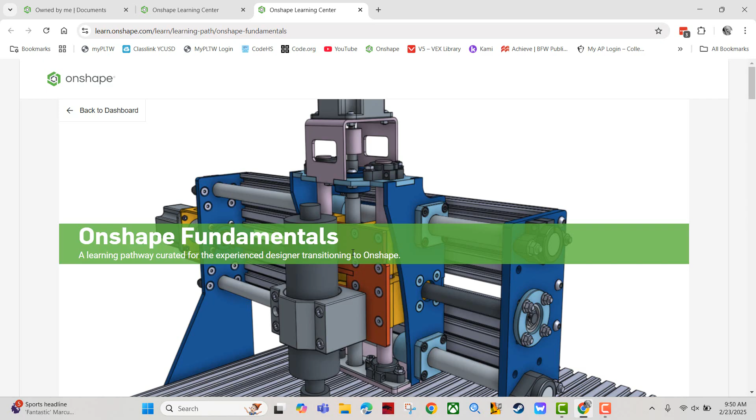So I'm going into my learning center and my Onshape fundamentals pathway, going down to Part Studios. This is the last one in the Part Studios category, and I'm going to scroll down to the rocket guidance reflector. I was close. All right, so there's the crazy thing we're going to make. It's that kind of copper colored part there on the top. So I'm going to hit next page, and we're going to get to the first of the instructions.

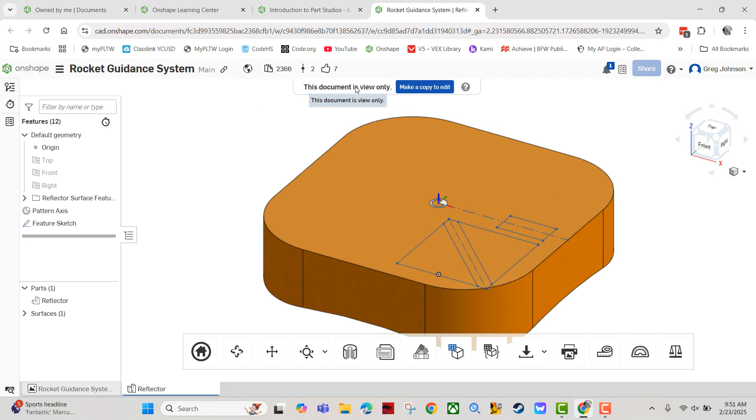Now, this is one of those ones that has a pre-made part. We're going to click on this link to open the document, Rocket Guidance System. So I'm going to click on that, and there's our reflector. Okay, it already has an appropriate sketch and everything that we need to get started. So if you notice, it says this document is view only, make a copy to edit. That's the first thing you have to do.

So let's click on that button, and I'm not going to rename it, but I am going to click on owned by me. I don't think you have to do that kind of thing because your folder system isn't as complicated as mine, but there you go. Now let's go back to our instructions.

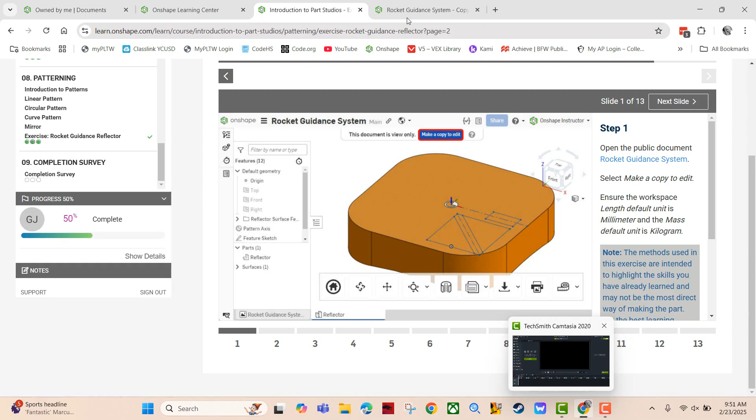So ensure the workspace is millimeter and mass is kilogram. Okay, so workspace is millimeter, mass is kilogram. I mean, length is millimeter and mass is kilogram, so we're good there. Let's see what else they want us to do. Okay, just go to the next slide.

Okay, investigate the new document. The Rocket Guidance System contains two tabs. One contains a picture of the finished system, and the other is the part studio where design work is started on the reflector. This part studio already has multiple features completed. There's also a mate connector on the center of the top face and a sketch with different profiles.

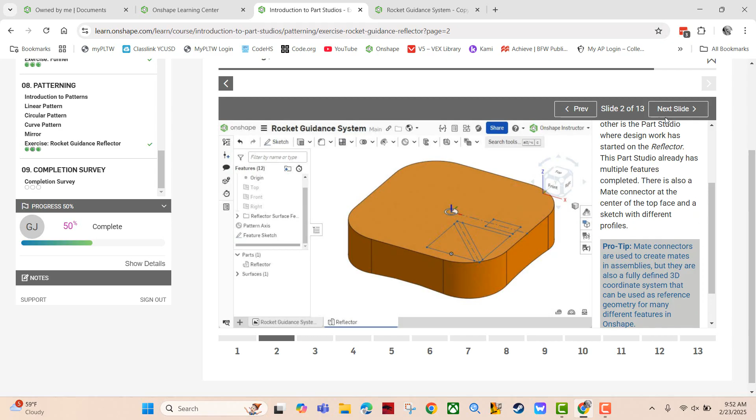Okay, so next slide. Extrude the triangular cutouts. So we're going to do a remove extrude, a solid remove extrude. We're going to click the two faces. We're going to do up to face with an offset of 10 millimeters. If we didn't click this offset, it would go all the way down to the bottom face. But the offset means we come back 10 millimeters. So it goes not quite all the way down, and then merge with all.

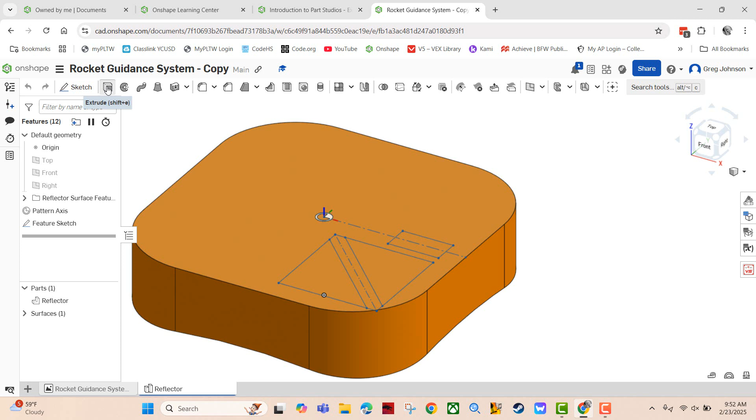So let's go back and do that. I'm going to zoom in on this and drag it to where I can see what's going on. I'm going to get extrude, remove, and I'm going to click those two faces. Okay, right now it says blind. I'm going to change that to up to face. And the face that we're talking about is the bottom of the part right there. And you notice it went all the way through. That's not what we want, but that's why we have the offset distance.

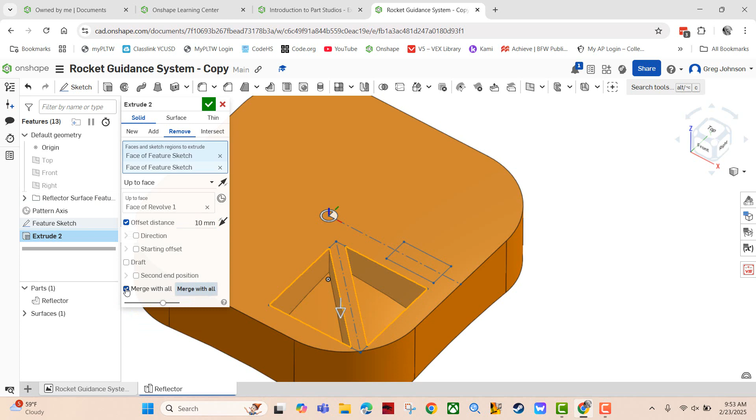So we're going to offset that by 10 millimeters. If you notice, it actually follows the contour of the bottom. That's kind of cool. All right, so there we go. Merge with all is what I believe it said. Yeah, merge with all. Everything looks good. Let's go ahead and accept that. So there's our extrude. All right, what's next?

Next slide. Add fillets to the triangular cutouts. Okay, so we're going to round off those corners by applying 6 millimeter fillets to each of those vertical corners of those triangular looking things. And we're going to do the bottom contours. So if you notice, it's curved right here, it's curved over here, lots of curves. So let's go ahead and do that.

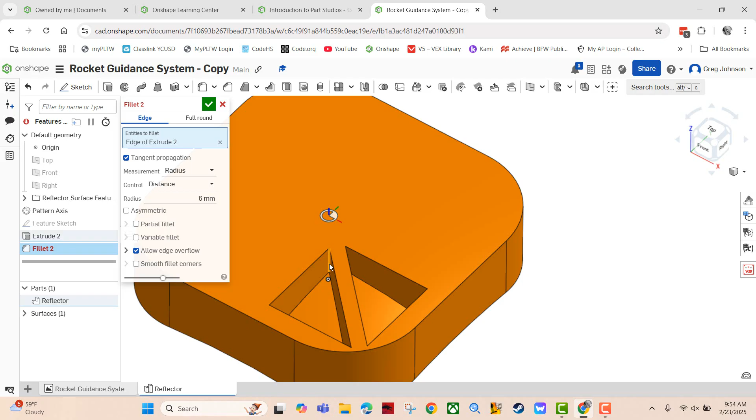So we're going to get the fillet. I'm going to change it to 6 millimeters and start clicking on things. I'm going to do the vertical corner ones first, and you're going to have to move things around so you can see the things you're trying to click on. And there's one. And there's one. And there's one. And there's one. Now I'm going to get those bottom edges.

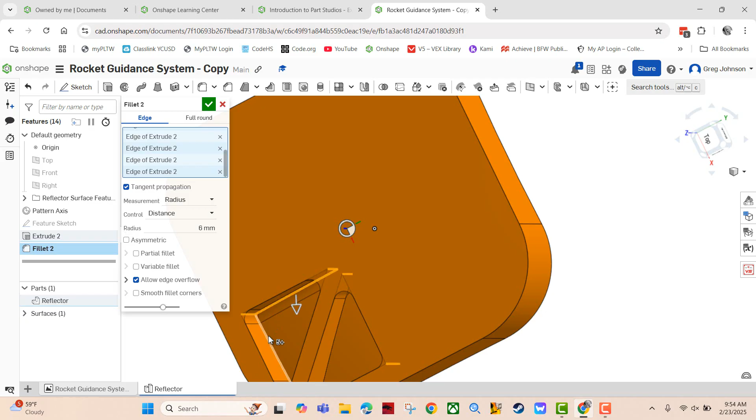So 1, 2, I'm going to do all the ones over here first. 3, 4, 5, and 6. All right, we've got all the beautiful contours. It's nice looking, isn't it? And we're going to accept that. Okay, and I'm going to go back to my isometric view and get back that look.

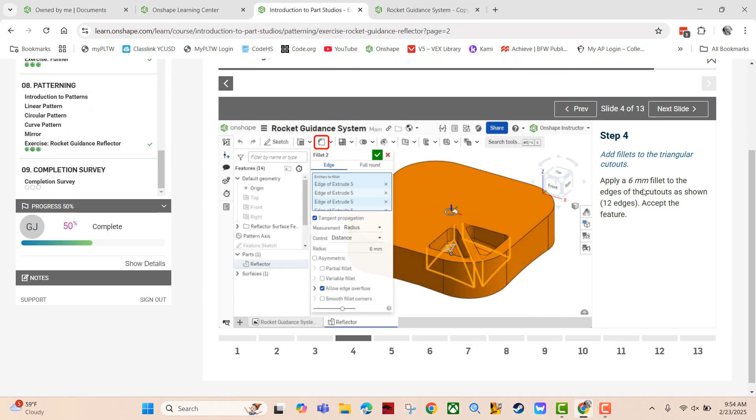Okay, what's next? We're going to do a feature pattern, a circular feature pattern. This is fun. Start a new circular pattern feature. Select a feature pattern from the pattern type drop down. With focus in the features to pattern field, select the extrude and the fillet features. Okay. And so let's go ahead and do that.

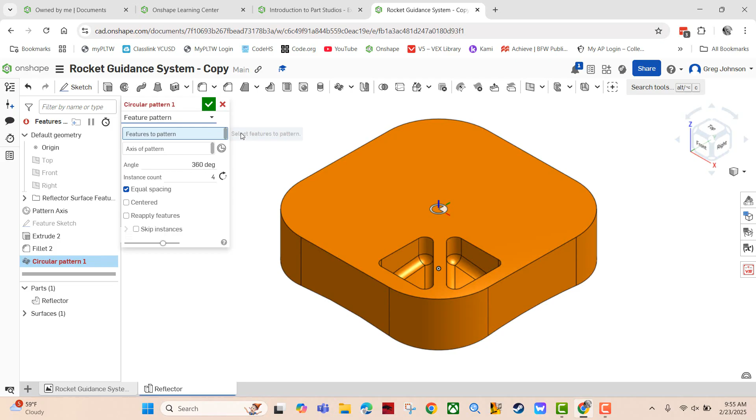So we're going to do a circular pattern. Now this is the linear pattern. If I click the drop down, there's our circular pattern. And I'm going to change it from part pattern to feature pattern. The most common thing people call me over for because they can't figure it out is because they forgot to change that from part pattern to feature pattern. Now the features to pattern, we just go over here and select them, extrude and fillet. The axis of the pattern is this guy.

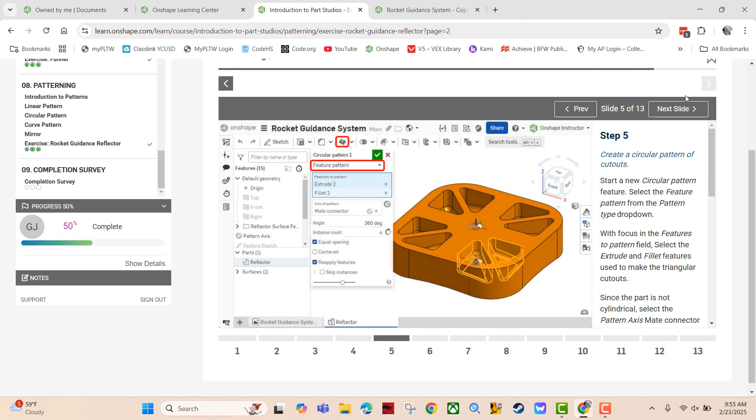There you go. That's why the mate was created in the first place. And if you notice, it's already defaulted to 360 degrees and 4 instances, which is exactly what we want. So let's go ahead and accept that. All right, what's next? Create an M45 clearance hole in the center of the face.

Start a new hole feature, select metric and simple with the focus in the sketch points to place holes field. Select pattern axis mate connector. Mate connectors can be used in place of sketch points to place holes. With the focus in the merge scope field, select the reflector part. Select the other options as shown and accept the features.

Okay, so we need to match this. So let's do metric simple and click the pattern axis. Let's start with that. So the hole, there we go. We're going to make it not counterbored, but simple. Sketch points to place hole. We're going to do that. There you go. And it made a little baby hole, but that's not the one we want. So let's go back and see what we want.

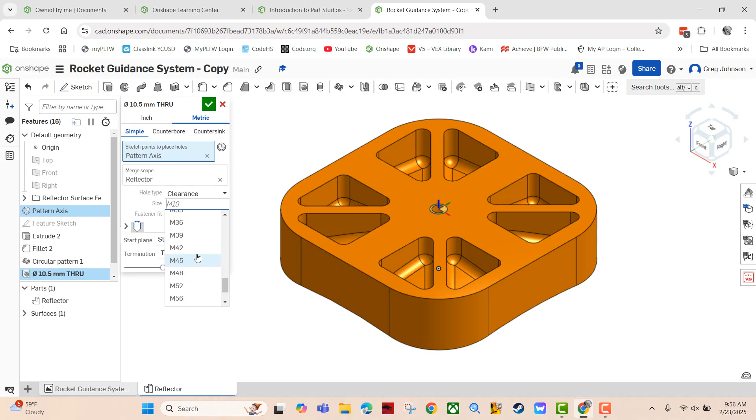We want a clearance M45 and close. So hole type clearance. We're going to scroll down to M45 and close. And if you notice, clearance, it went all the way through. Kind of makes sense. We're going to go clear through it. Okay, but if you go down to here, it says 48 millimeters, start from part, blind. So let's go back and, 48 millimeters, start from part, not through all, but blind.

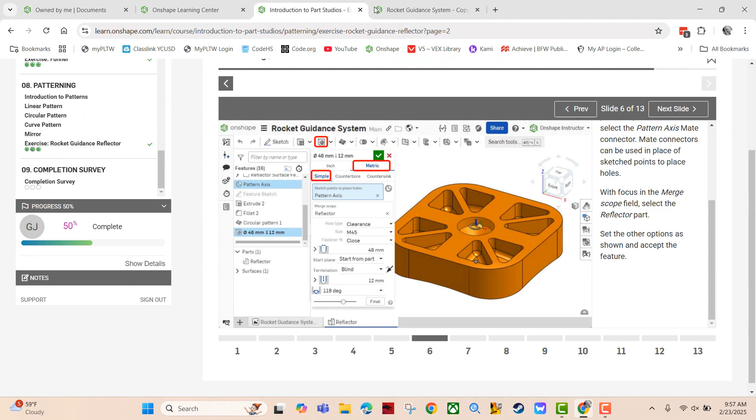There you go. Now you notice it still doesn't look right. You can still see a hole down there. So we got to go back and get a little bit more. We want 12 millimeters and 118 degrees for that angle at the bottom. So that, oh my God, I already forgot what it said. 12 millimeters and 118 degrees. So it's already at 118 degrees. We're going to change it to 12 millimeters. And now we have what we're looking for.

You notice the bottom face kind of looks like a drill bit. That's kind of exactly what it is. Okay. And let's make sure there's nothing else we need to do. Looks about right to me. So we're going to go ahead and accept that. All right, moving on. Next slide.

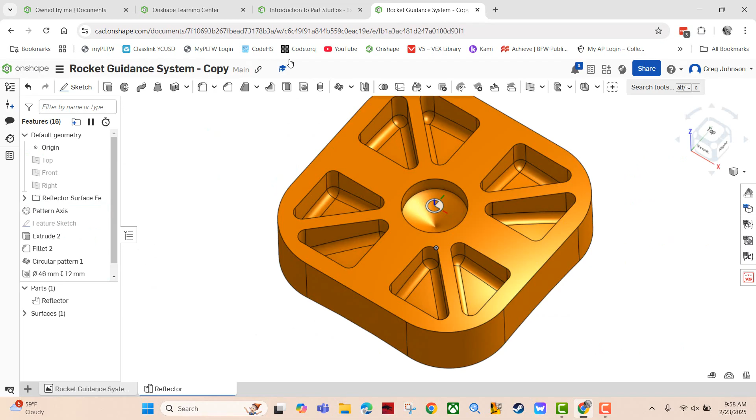So let's do that. So I'm going to right click on the face, make a new sketch, and hit N to look at it properly. And I'm going to get the sketch point. I'm going to start by locating at the origin, going straight down, and I'm just going to click somewhere. Okay, now I'm going to get the dimension tool, click here, here, and make that 26. Bingo. That's what we needed to do. Anything else? Nope. Okay, so we're going to accept that and move on to the next thing.

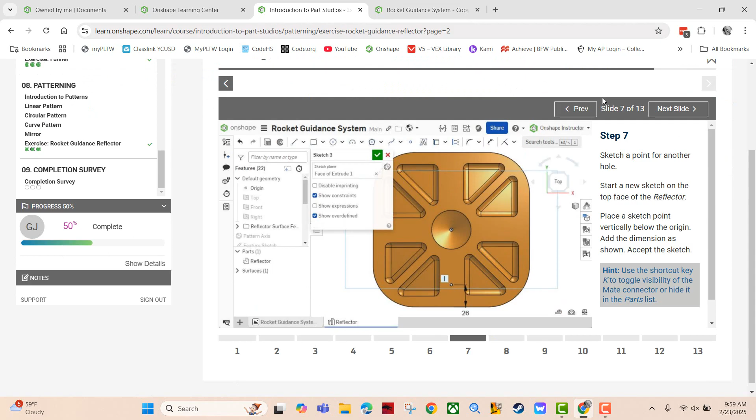All right, create an M10 tapped hole. So again, we're going to do a hole feature, and we're going to make it match all this fun stuff over there. So let's start with the hole feature. We're going to click on that sketch point that we just made. Whoa, look at that giant thing. What's the problem? Well, it's supposed to be M10. That's much smaller. There we go. That's a little more normal. Doesn't look right because we got to make all this stuff match. So let's go and see what we got over here.

We've got tapped, straight tapped M10 1.5 millimeters. Okay, tapped, straight tapped 1.5 millimeters. Tapped, straight tapped. Okay, all that stuff already matches. Let's go back. Fastener fit, none. We have fastener fit close. Let's make that none. Okay, what else do we need to match? So we've got 8.5 millimeters, start from part, blind. 8.5 millimeters, start from part, blind.

That's good. Then we've got 20 millimeters, 118, and 10.2. I can only remember 3 things at a time. And I already forgot one of them. 20 millimeters, 118, 10.2. So 20 millimeters. And there we go. And 10.02, let's scroll down, see if that last 6.653 matches. It does. Okay, I think we're good. We've got our hole. Now let's go back.

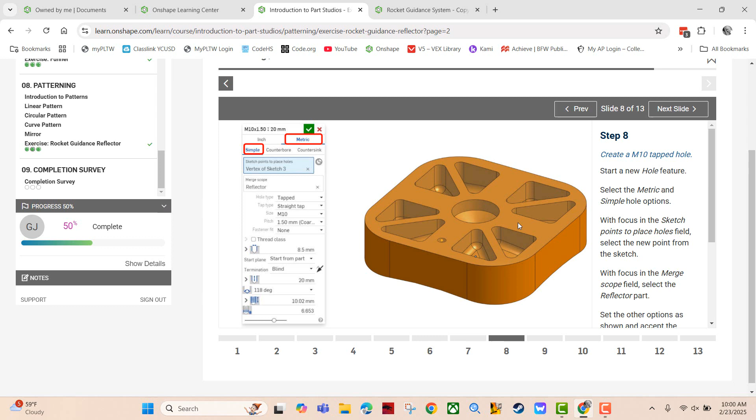Okay, so now we're going to create more of those. We're going to do a linear pattern this time. Start a new linear pattern feature. Select the face pattern from the pattern type drop down. Note, face pattern is always the fastest to regenerate, so you should use it over other pattern types whenever possible. Hole callouts still work correctly in drawings when using the face pattern. With the focus on faces to pattern field, select both faces of the hole. In other words, the side of the hole and the bottom of the hole.

With the focus in the direction field, select the edge labeled A, so we need to know what axis to make it parallel to. And there should not be holes where the larger clearance hole is. Check skip instances with the focus in the instances to skip. Select the 2 gray dots in the center labeled B. Okay, that's a lot of stuff to remember. Let's just go back and start our linear pattern.

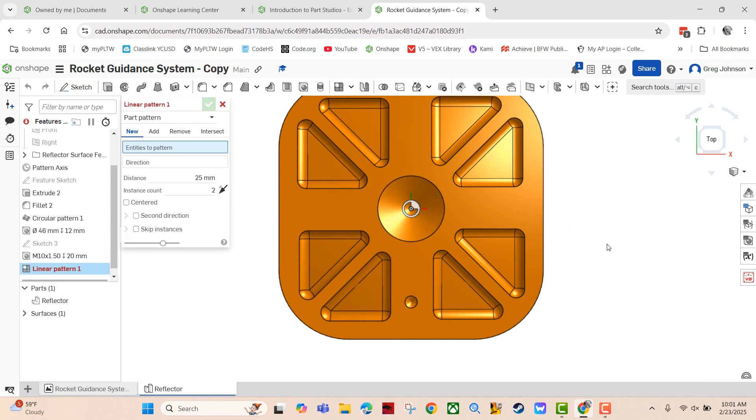So I'm going to have to get to the drop down again because we used the other type of pattern first. I'm going to move this a little bit like this so we can see what's going on. Okay, so we're doing a face pattern this time, and the faces to pattern are the bottom. I'm going to zoom in, select the side first and then select the bottom. And you got to get both of those.

And then I'm going to click on the direction. I'm going to select that side that they mentioned. And you notice, uh-oh, it's going the wrong way. Well, that's easy enough to fix. We're going to click the opposite direction arrow, and there you go. Now we've got some other things to fix here, so let's go and see what we've got.

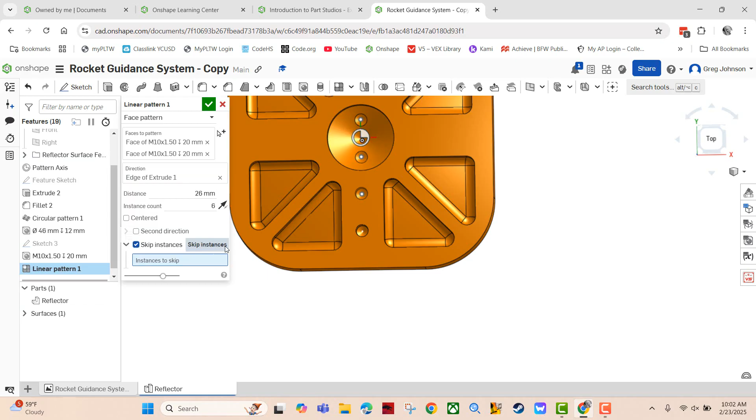Distance 26 millimeters and 6 instances. So 26 millimeters instead of 25. We want 6 instances. And see how it put some holes in our center. That's what we didn't want. So what we're going to do is scroll down until we see skip instances. We're going to click that, and the instances to skip are those 2 center ones. See how easy that is?

And now look at what we got. Here, I'm going to drag it so we can see it a little better. Look at that. Linear pattern. Isn't that a cool thing? All right, I'm going to accept that, and let's move forward.

In the next slide, we are going to create a rectangular cutout. So it's this cutout that you see right over here. Okay, sketches automatically hide when they're added to a feature for the first time. So show the feature sketch in the features list, in other words over here, and start a new extrude feature. Select the solid and remove, select only the rectangular contour, and do blind 11 millimeters.

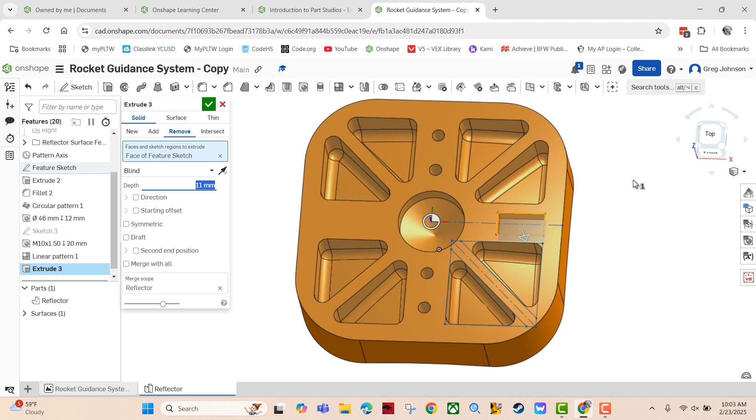So I'm going to unhide that sketch, number 3. Whoops, wrong one. That sketch, feature sketch, that's it. Okay. Excuse me. We're going to select a remove extrude, select that rectangle over there, and it was 11 millimeters, if I'm not mistaken. Let's double check that. Yes, 11 millimeters. And there it is, a nice little hole. So we're going to accept that extrude, and now we are going to go on to the next sketch.

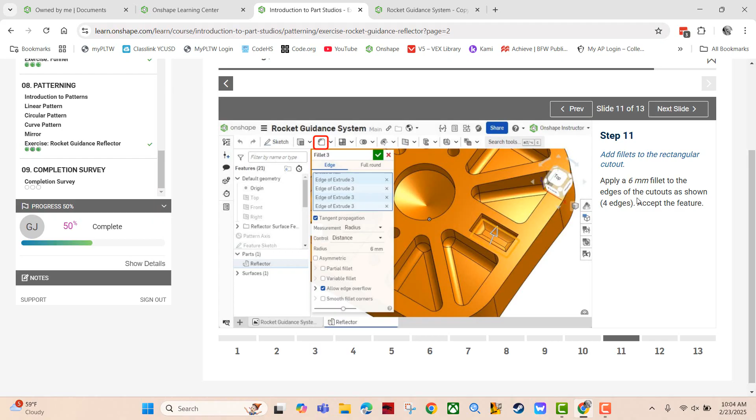And this time we're going to make some more fillets, 6 millimeter fillets, to all the edges shown, which is 4 different edges. Wait, that's not true. We're only doing the vertical side edges. So let's get down in there and zoom a bit to get that where we can see what's going on. And let's select the fillet. It's already on 6 millimeters since that was what we used last.

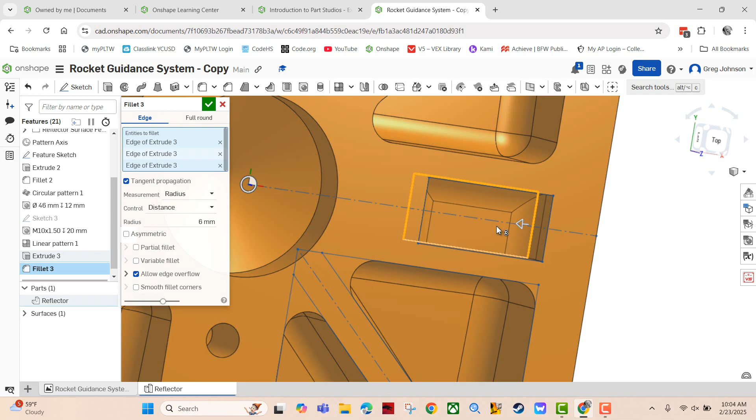I'm going to click that vertical one. Did I do that right? Maybe not. Let's go back. No, actually, I think it's the bottom one. So that's easy to fix. Let's delete that edge. Let's try that. Oh, there we go. That was it. Okay. It's the bottom corners. And bingo, look at that cool thing. All right, let's accept it. And let's go on to our second to last slide.

Now we're going to mirror this. Start a new mirror feature, select the face mirror from the mirror type dropdown, select all the faces of the cutout all the way on the bottom, 9 faces, and use the right plane as the mirror. Okay, so pro tip, click the Create Selection icon to the right of the Faces to Mirror field to start the Create Selection dialog. Select Faces and then Pocket from the drop-down. Select one of the faces of the cutout and Onshape automatically selects all the other faces for you.

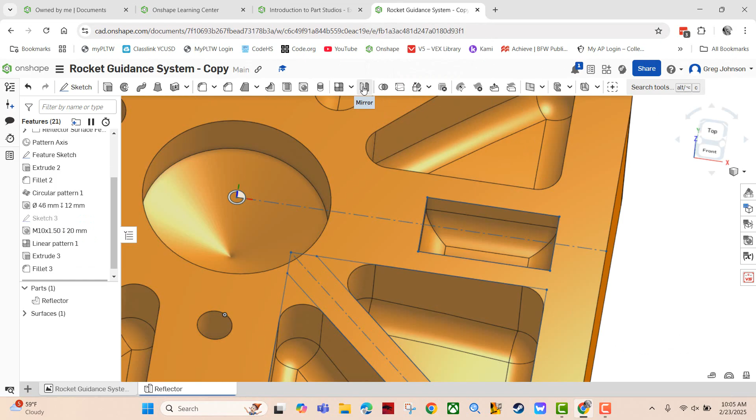Ooh, I want to try that. Okay, so let's go and do our face mirror. So there's the mirror, and we're going to make it a face mirror. And faces to mirror, this is what they're talking about, create selection. So I'm going to select, let's go back and look again. Pocket, I'm sorry. Let's go and select not protrusion, but pocket. And let's select one of the faces and see what happens.

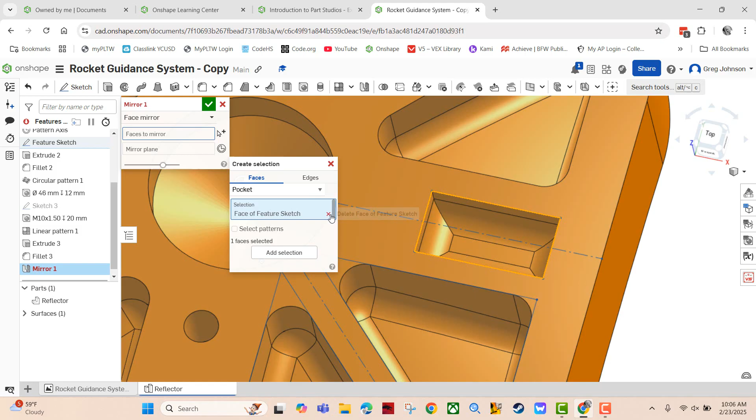Oh, that didn't work. I think that sketch is in the way. Let's hide that sketch. Feature sketch, go away. There we go. Select one of the faces. Oh, look, it got them all. Isn't that awesome? All right, so add selection. And look, it got all of those faces for us.

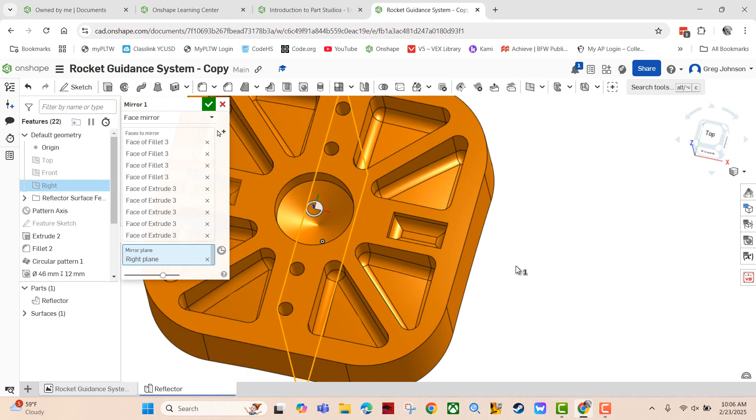Now for the mirror plane, I'm going to click there, and I'm going to scroll back up, click on the right plane, and let's zoom out. And oh, look, it made it over on to the other side. There we go. Look at that. Let's accept that mirror and go on to our last slide where the reflector already has the material aluminum.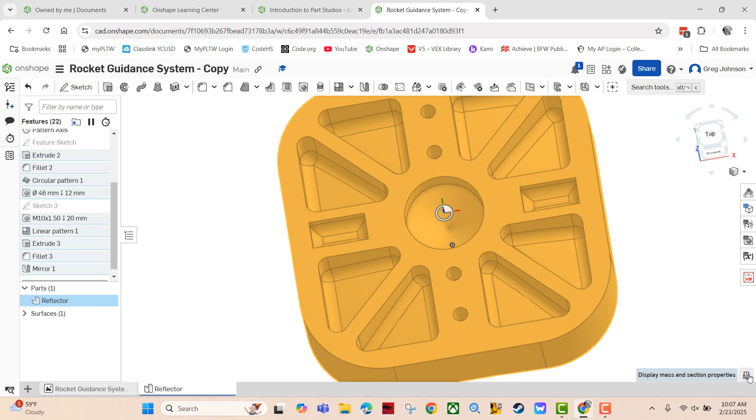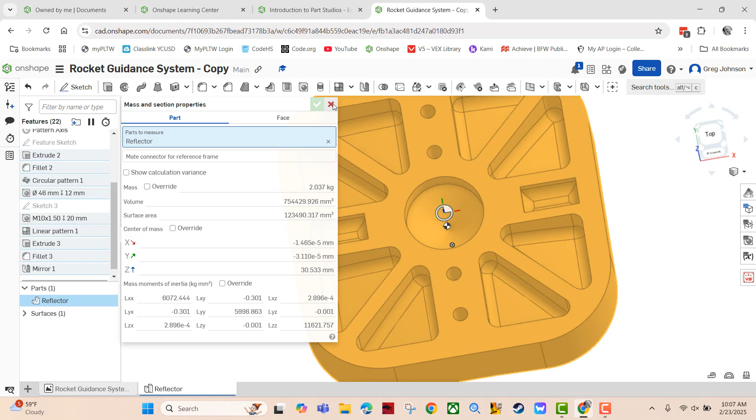Select the reflector from the parts list and click the display mass and section properties, and we're going to look at the mass. So we're going to select the reflector, go all the way to the bottom right, display mass and section properties, and I got 2.037 kilograms. I'm going to come back here, click the next page, begin self-checked, 2.037 kilograms, and we win. What's our big prize? An A. All right, cool. And you guys, that is how you make the rocket guidance reflector part.